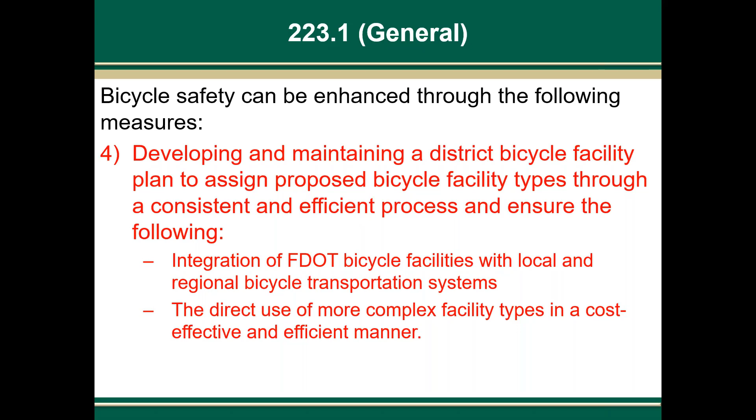Next, we removed the blue boxes throughout this chapter. In the other webinars that I've done, I have said with each section when a blue box has been removed, but here, just across the board, those have been removed.

There's a change in the bicycle facilities section. We removed the wide curb lanes from the list of bicycle facilities. That kind of goes back to this idea that the design users we're thinking of will be less confident or comfortable mixing with motorized traffic, but there's some other thoughts that we had behind that decision as well. So that is a change you'll notice.

And then also in the bicycle facilities chapter, we talk about this idea of when to have a bicycle lane. So this chart you see here, this is actually taken from the bikeway selection guide that FHWA put out. And you can see sort of these fuzzy little lines of under what conditions they encourage different types of bicycle facilities. And they purposefully made those lines to be fuzzy and to not go out directly to one of these areas, so there's some decision making that comes into play.

And also what's not shown on this chart is this is meant to be specifically for more urban areas, and they also had some notes that went along with it, so I encourage you to look at the guide and better understand the context of this. But how we interpreted it for the FDM is that we say that bike lanes are allowed up to 45 miles per hour, but we prefer other facilities when over 30 miles per hour.

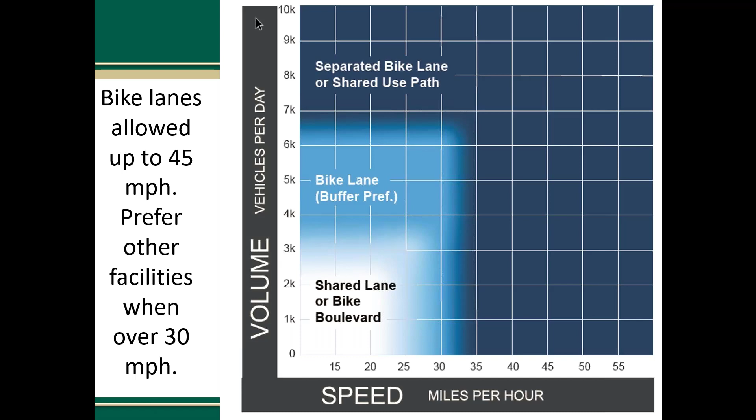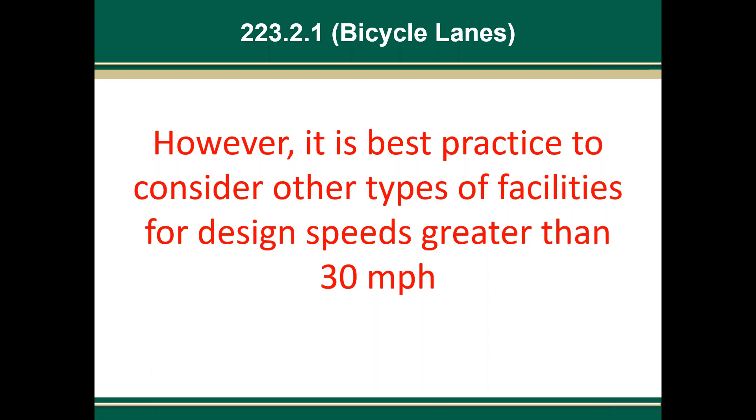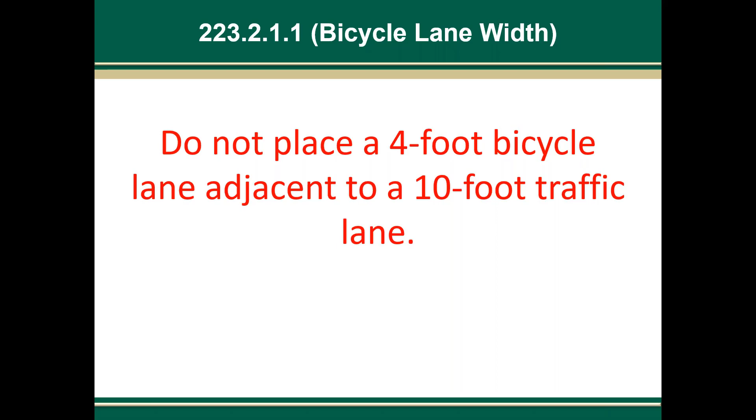So this is the exact text that we use. In the bicycle lane section, we state, however, it is best practice to consider other types of facilities for design speeds greater than 30 miles per hour. In the bicycle lane width section, we have a clarification, and basically we're stating that it's not best practice to have all minimum widths next to one another. This is something that we've sort of been informally teaching, and it's been a best practice, but we've never specifically spelled it out in the FDM, and so we went ahead and did that.

There are a lot of changes to the green colored pavement markings section of this chapter. Part of that comes from the fact that we're starting to see more and more green colored pavement throughout the state, and as that ramps up, we want to make sure that we have a sophisticated process in place for keeping track of where they are being implemented. And so some of the reasons why we're interested in keeping track of them is because we're allowed to put green colored pavement markings out there as part of our interim approval with the FHWA. So as part of that agreement, we need to keep track of where they are in case they rescind the agreement, and then we would need to remove them.

But additionally, we have other groups within FDOT that are interested in knowing where these are placed throughout the state. And so for all those reasons, we want to have a more sophisticated process in place for keeping track of their implementation. So you're going to see more text as we go through this section on that, but this section has had some considerable changes.

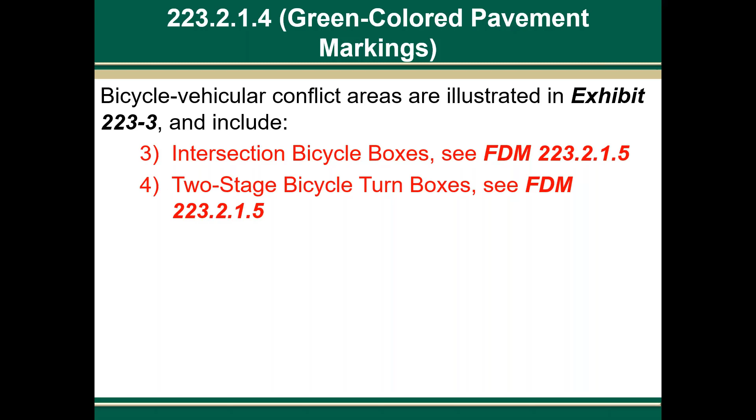So first of all, we talk about bicycle vehicle conflict areas are illustrated in Exhibit 223-3 and include intersection bicycle boxes and two-stage bicycle turn boxes. So beforehand, we hadn't spelled those out, but those two always have green colored pavement markings, so we went ahead and included them. So this is part of our effort to make it a little bit more sophisticated how we keep track of our green colored pavement throughout the state.

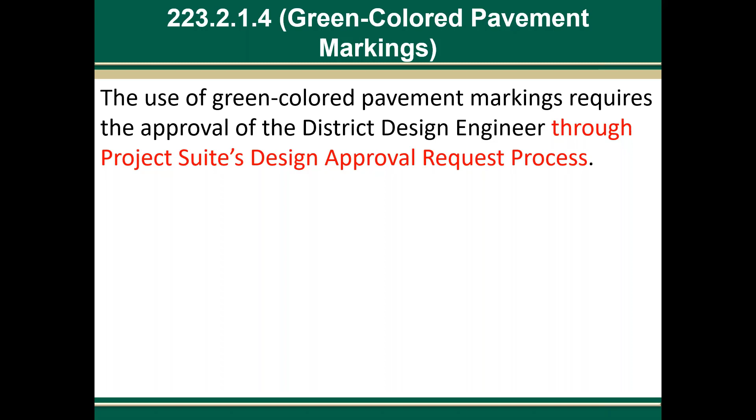We added text saying the use of green colored pavement markings requires the approval of the district design engineer through the project suite's design approval request process. Next, include quantities in accordance with the basis of estimates manual. Load these quantities into the designer interface in the signing and pavement marking category.

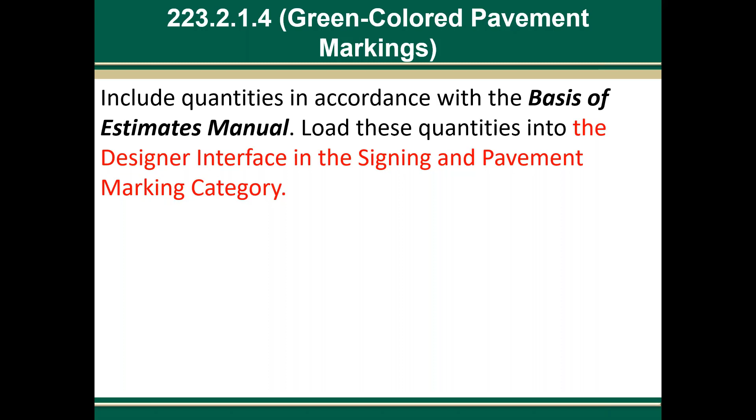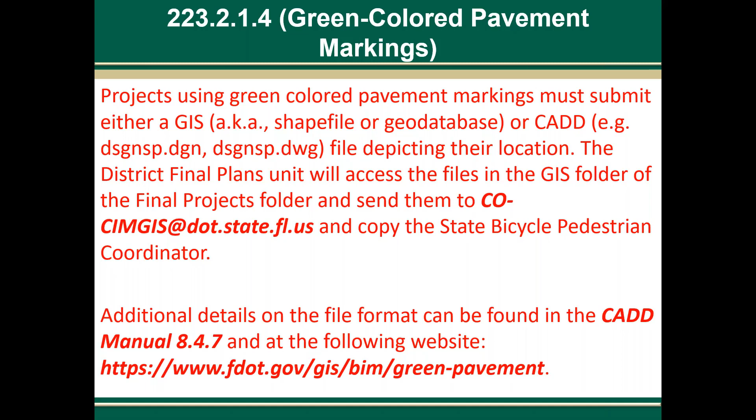Projects using green colored pavement markings must submit either a GIS or CADD file depicting their location. The District Final Plans Unit will access the files in the GIS folder of the Final Projects folder and send them to this email address and copy the State Bicycle Pedestrian Coordinator. Additional details on the file format can be found in the CADD manual and at the following website.

So the next section that we have some changes in are the intersection bicycle box and the two-stage bicycle turn box. This is new text that we have clarifying in what instances either one might be your best option. Intersection bicycle boxes increase the visibility of stopped bicycle traffic at an intersection and help group together bicyclists to clear intersections more quickly.

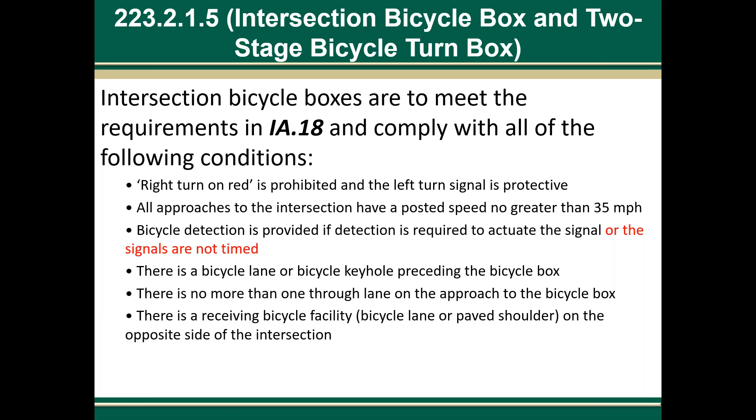Two-stage bicycle turn boxes provide another option for bicyclists to make a left turn at an intersection. So this is a request that came from the districts to clarify that we don't need to have detection of bicycles if the signals are pre-timed. So we just spelled that out by adding some text there. This is the same thing, just in a different area of the section.

The next change is in the marked shoulders section. In the past, we said that paved shoulders should be marked when we are in a C3R situation, and now we're saying either C3R or C3C, so we just generalize it to say C3. So the paved shoulder should be marked only when all the following are met.

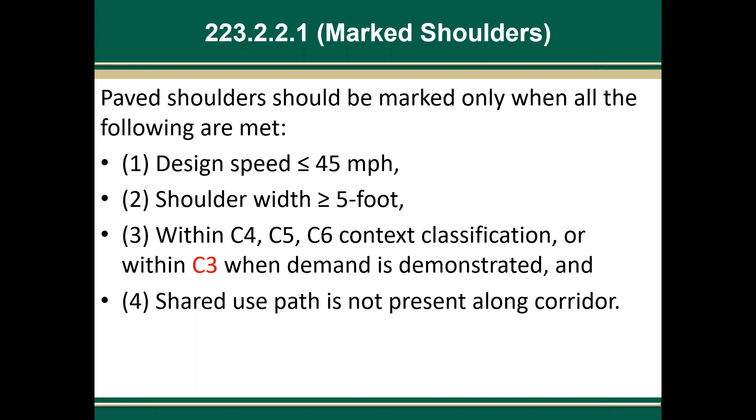There's a design speed less than or equal to 45 miles per hour. The shoulder width is greater than or equal to 5 feet, and it's within the context classifications of C4, C5, C6, or within C3 when demand is demonstrated, and a shared use path is not present along the corridor. This goes along with removing the wide curb lanes in that bulleted list of our bicycle facilities. We likewise removed the section on wide curb lanes.

All right, so there are some changes to the shared use path section of the chapter. All this red text here is new, and I'll just go ahead and read through it. A shared use path may be substituted for a bicycle lane when the roadway design speed is greater than 35 miles per hour and all of the following conditions are met. The context classification is C1, C2, or C3. Separation can be maintained between bicycle and motorized traffic through intersections, and conflict points are minimal and mitigated.

As shown in figure 223.2.1, in some cases, it may be possible to fit a shared use path into the same space required for a sidewalk and buffered bike lane. In other cases, additional width may be required. See FDM 224 for shared use path design criteria. It is preferable to plan for shared use paths and separated bicycle lanes ahead of time by reflecting them in a district bicycle facility plan.

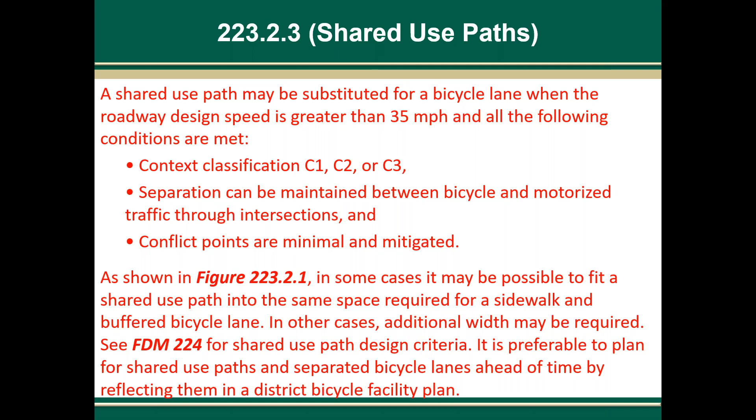So this is a pretty big change for us, all of this information here. This is the figure that was referenced in the previous text. This is a new figure, and this is just giving an idea of how this could look in your project.

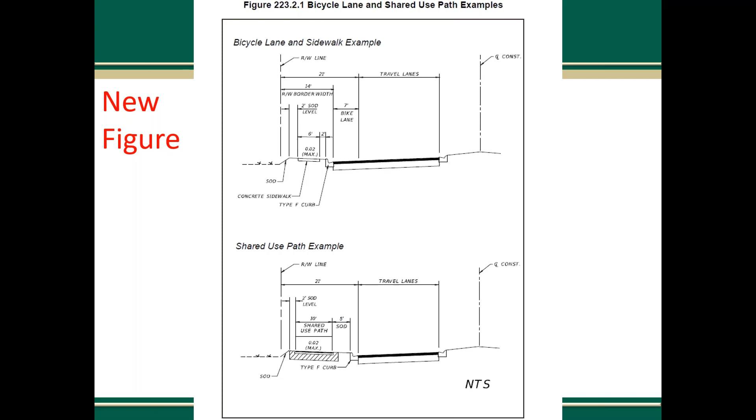We removed some text in the shared lane marking section. Sharrows are used where it is not practical to provide a bicycle facility and any of the following conditions exist. We removed from that list the travel lane is too narrow for bicyclists and motor vehicles to travel safely side by side. We included quite a bit more guidance on separated bike lanes in this chapter.

A separated bike lane may be used when all of the following conditions are met. A minimum required combined width of the separator and separated bike lane can be obtained. Separation can be maintained between bicycle and motorized traffic through intersections. And conflict points are minimal and mitigated. Cyclists should be given priority at the driveway and side street crossings.

So basically what we're saying here is that we don't want a separated bicycle lane to just be kind of put into an area unless it's done well. So we want to make sure that the separated bicycle lanes aren't just kind of squeezed in, but instead that they truly have enough space and that we've been mindful of how much separation is being provided and how the conflict points are being managed.

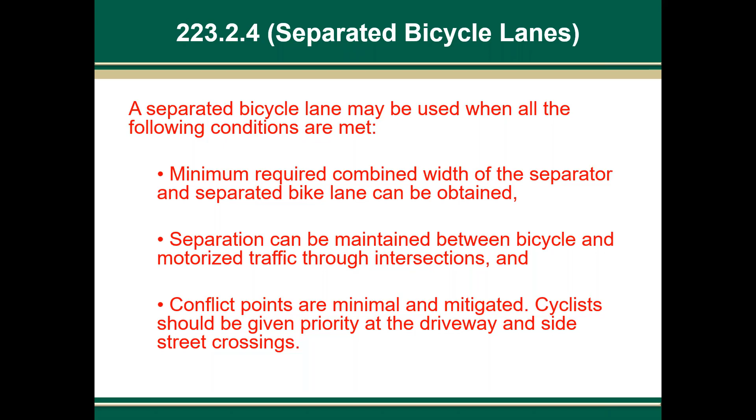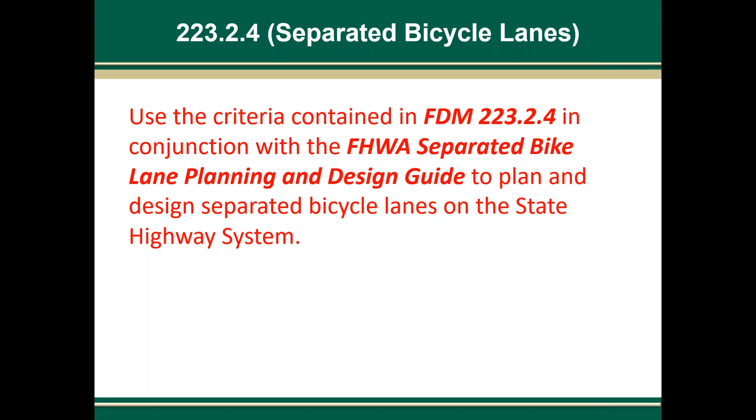Use the criteria contained in FDM 223.2.4 in conjunction with the FHWA Separated Bike Lane Planning and Design Guide to plan and design separated bicycle lanes on the state highway system. So in addition to that new text in the overview section of separated bike lanes, we've also created a number of new sections. One of them is type of separation.

With roadways that have 35 miles per hour or less, you may use an express lane marker, a raised median such as traffic separators, on-street parking with a raised median, and rigid barriers. If the roadway has a speed limit of 40 or 45 miles per hour, then the types of separation that are allowed are raised medians such as traffic separators or rigid barriers. And other forms of separation require approval from the state roadway design engineer.

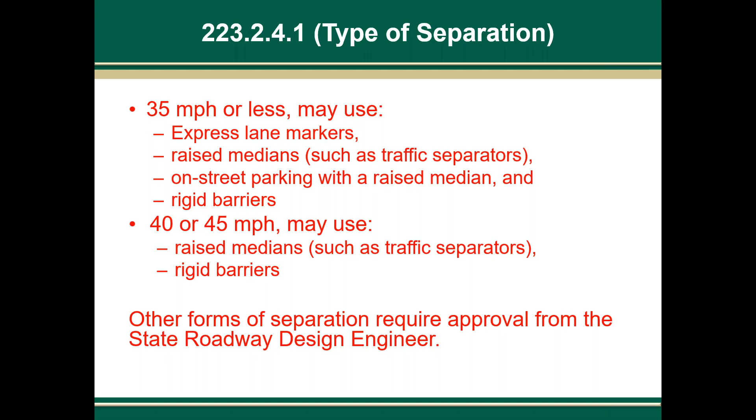So if there's other separations out there, which there certainly are, if there are other ones that interest you for your particular project, it could still be considered, and go ahead and just bring it up to us to take a look at.

We have another new section on the width of separation. The widths of separation are as follows. A 3-foot minimum if adjacent to on-street parking, and that's to allow for the door zone. See figure 223.2.2 for more information. And if adjacent to travel lanes, when it's 35 miles per hour or less, 6 feet

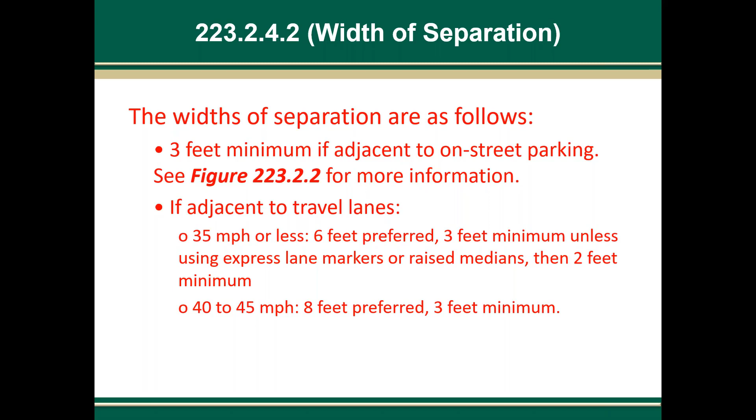is preferred, a 3-foot minimum unless using express lane markers or raised medians, then a 2-foot minimum. And then when it's 40 to 45 miles per hour, 8 feet is preferred, and there's a 3-foot minimum. We also provided a new figure, and that is figure 223.2.2, on-street parking, minimal separation.

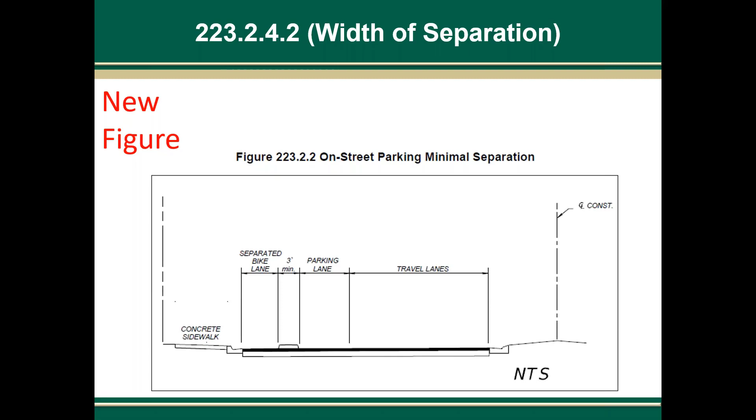So again, we're just underscoring here that if you're using parking as part of your approach to separate the bicycle lane from the travel lane, a 3-foot minimum separation is required for that door zone. And the door zone is the space that is needed for a car door to open so that the person biking doesn't run into it.

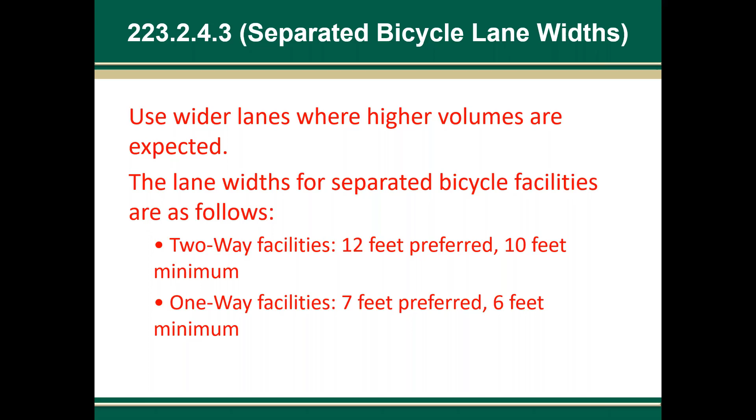We also have a new section on separated bicycle lane widths. Use wider lanes where higher volumes are expected. The lane widths for separated bicycle facilities are as follows. Two-way facilities, 12 feet preferred, 10-foot minimum, and one-way facilities, 7 feet preferred, 6 feet minimum.

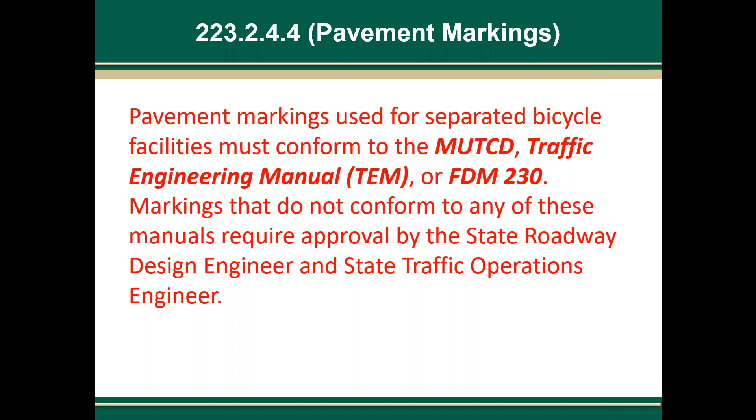We also have a new section on pavement markings for separated bike lanes. Pavement markings used for separated bicycle facilities must conform to the MUTCD, TEM, or FDM 230. Markings that do not conform to any of these manuals require approval by the state roadway design engineer and state traffic operations engineer.

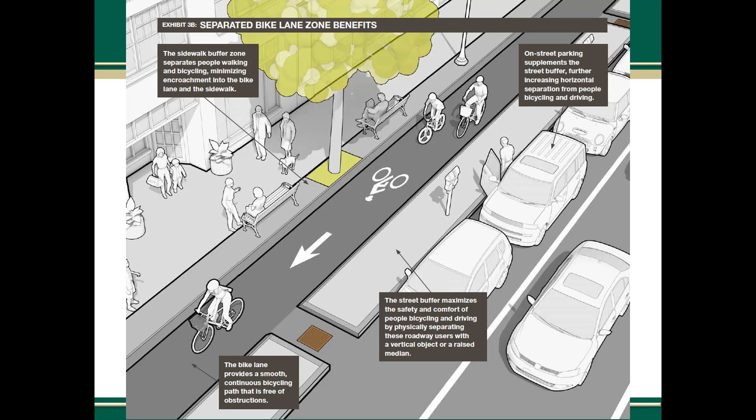All right, so next I have a number of images. These aren't in the FDM, but hopefully they'll help illustrate a little bit more where we're coming from and what you might be seeing on some projects in the future on the Florida state system. So this image here actually comes from the Massachusetts DOT, their new guide that they put out. And what this is showing is sort of that door zone area. Again, this is a raised median in conjunction with on-street parking. So this is a nice visual that kind of helps describe separated bike lanes.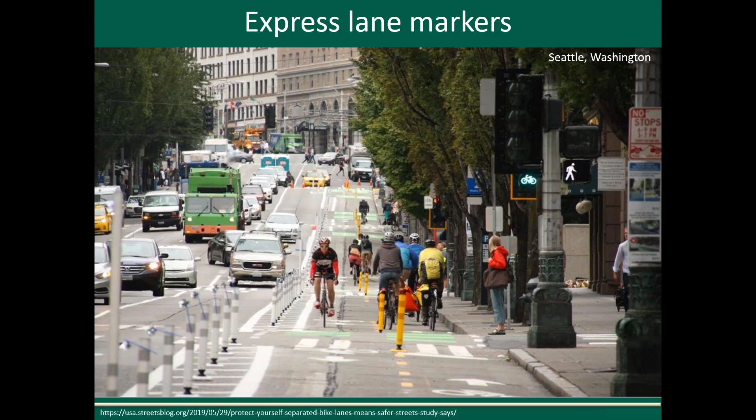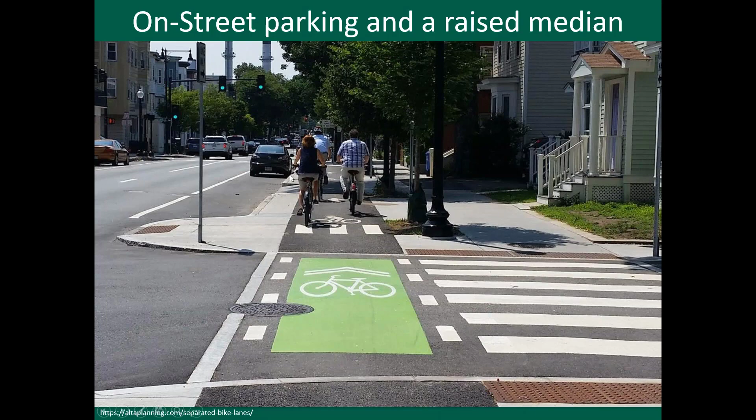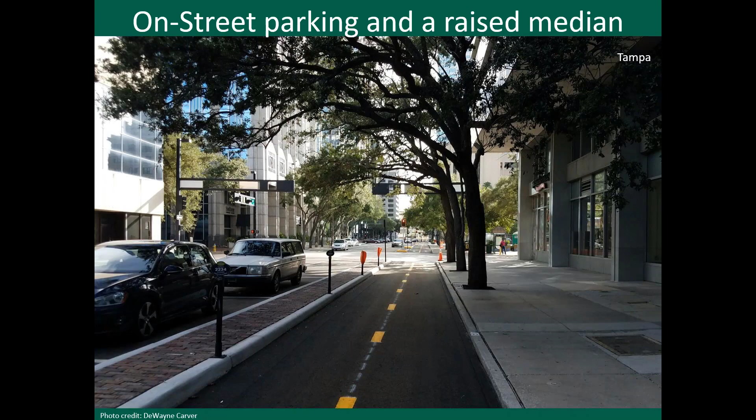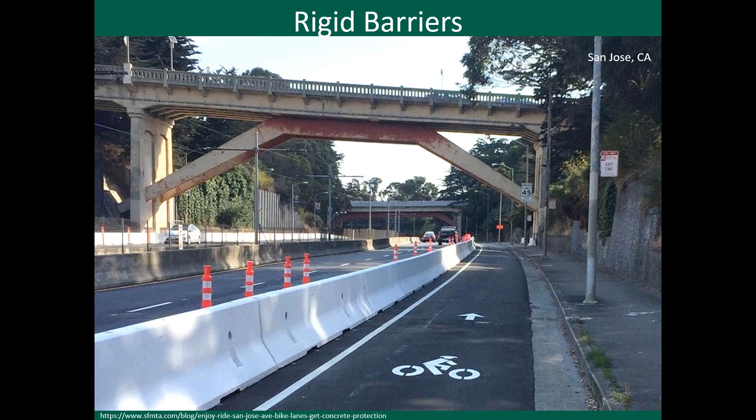Raised medians are also talked about in the new FDM 2020 chapter. Here we have a raised median with on-street parking. Here's a raised median with on-street parking in our very own Tampa. Very proud to see this. This is the first separated bike lane in the state of Florida on the state system. So we talked about rigid barriers in more of our high-speed conditions, and this is an example of that in San Jose, California. And here's another rigid barrier example.

We also have a new section in the separated bike lanes part about intersections and driveways. Chapter 5 of the FHWA Separated Bike Lane Planning and Design Guide includes typical designs to address the following: facility connections at intersections, side streets and driveways, and traffic operation tools such as bicycle signal faces and signal phasing. See the TEM for more information on traffic operation tools.

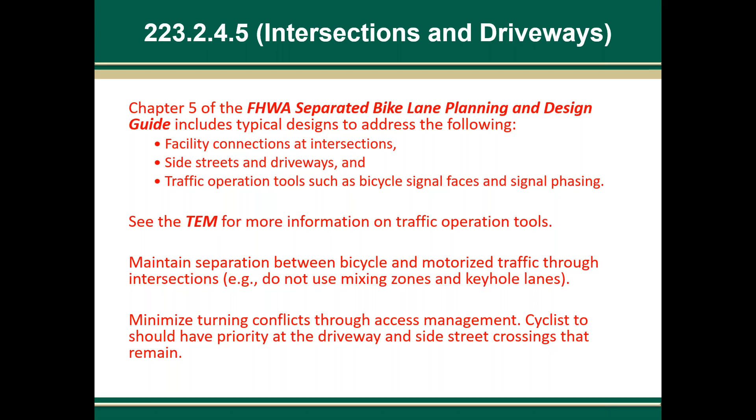Maintain separation between bicycle and motorized traffic through intersections. So we do not want mixing zones or keyhole lanes once we come up to an intersection. It's really important that that separation be maintained. That can oftentimes be the most stressful part for the cyclist, at those conflict areas, so we want to make sure separation is maintained. Minimize turning conflicts through access management. Cyclists should have priority at the driveway and side street crossings that remain.

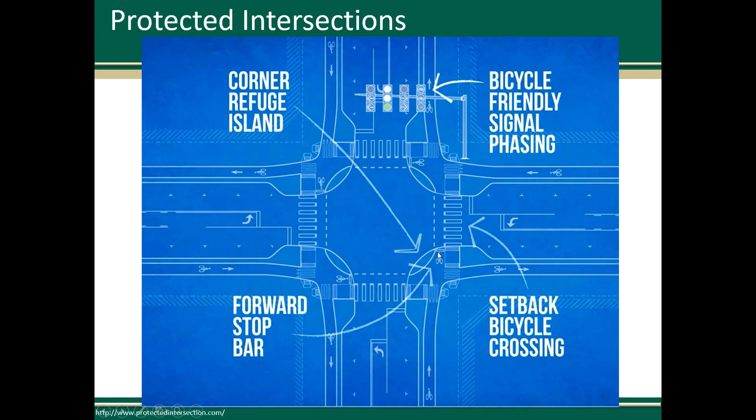So I talked in the previous slide about maintaining separation through intersections. One way to potentially do that is through a protected intersection. This is not in the FDM, but this is an example of how that might be achieved. So it's showing that the cyclists, when they come up to an intersection, there's these little corner refuge islands that will keep them separated from the car traffic, which would be over here. And then they would have their own space separated from the pedestrians to traverse an intersection.

All right, those are all the changes to the FDM 223 bicycle facilities chapter. We're really excited to have put that together for everyone, and we hope that it will work well.